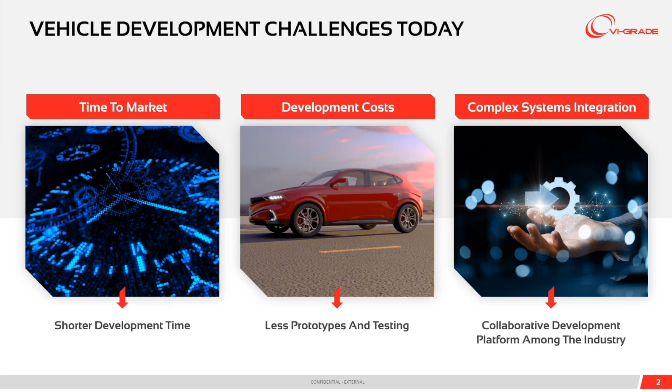Third, the systems inside modern vehicles are more complex. Electrified drivetrains, ADAS, active chassis systems, and sophisticated electronic controls all need to be integrated and bound together. Finally, development is global. OEMs, suppliers, and partners are spread across multiple locations. This requires collaboration platforms that allow models and results to be shared reliably and securely. These are the realities that shape our approach to simulation.

What is VI-CarRealTime, and what do we need to do today to meet the challenges just mentioned? We need accuracy, so that engineers can trust the simulation results. We need efficiency, so that results are available quickly enough to guide decision-making. We need the ability to evaluate designs rapidly and optimize them early without waiting for prototypes.

We need seamless collaboration between global teams and suppliers. And finally, we need one consistent model that can follow the entire process, from the first design concept to the final validation. This is exactly what CarRealTime has been designed to deliver.

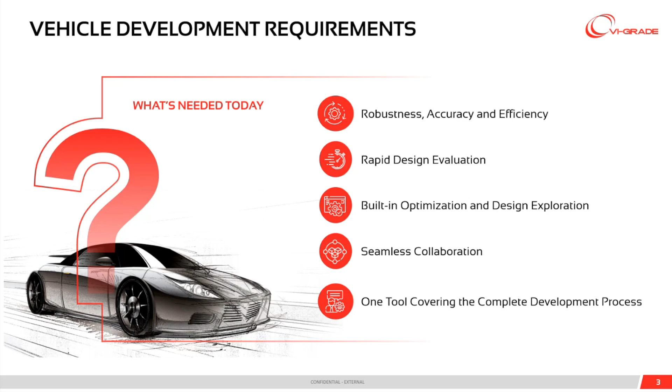Robustness, accuracy, and efficiency are not optional in simulation, they are essential. This is why they are the first unique strength of VI-CarRealTime. The tool is tested daily by OEMs and suppliers worldwide under some of the toughest development conditions. With it, engineers can evaluate tire performance virtually before a prototype exists, develop next-generation chassis control features, deploy advanced drive-by-wire systems, and even prepare a vehicle aimed at record-breaking performance.

What matters most here is that engineers do not waste time waiting for results. The solver delivers feedback instantly, so focus stays on development decisions rather than on managing the tool. That is why leading companies choose VI-CarRealTime, because it's fast, accurate, and reliable enough for their most demanding programs.

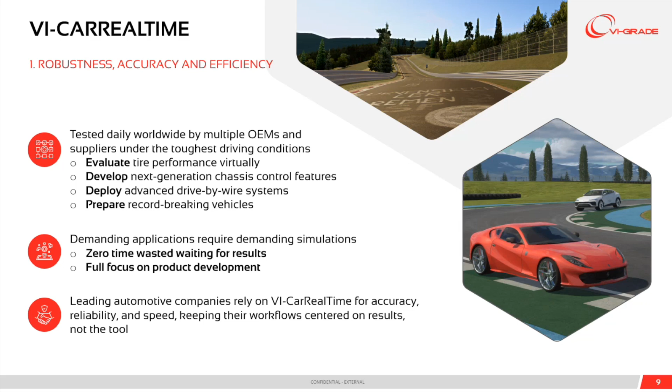Accuracy also depends on starting from validated models. Starting data are really important. With VI-CarRealTime, engineers can benchmark their design against internal and external targets with confidence. Through access to the IDIADA library of validated vehicle models, they can compare against trusted references from top brands. The K&C wizard makes it easy to build a benchmarking model quickly using real suspension data or experimental K&C maps.

On top of that, visualization tools like the Animator allow engineers to make direct visual comparisons across analyses or against CSV data. It's as well possible to transfer data to external post-processing environments. The result is a workflow where benchmarking is fast, intuitive, and directly tied to real-world vehicles, ensuring the model delivers robust and accurate insight.

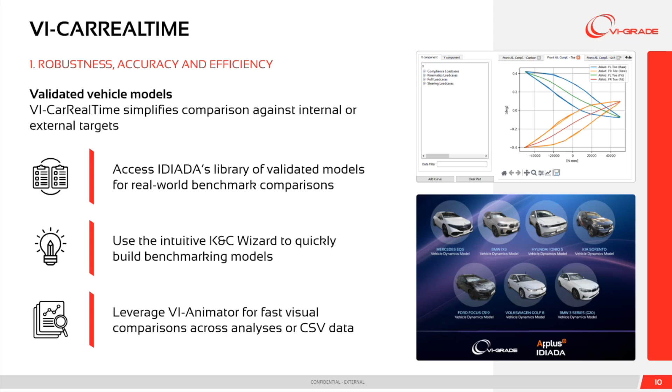Robustness also means being flexible enough to integrate complex mechatronic systems. VI-CarRealTime supports this through customizable connections for control logic. Engineers can deactivate subsystems to create custom setups or insert their own user-defined logic at different points in the model to control specific vehicle functions.

Equally important is seamless integration of external models. Subsystems developed elsewhere can be connected from MATLAB Simulink, FMI-compatible tools, or directly through C and C++ code with an extensive solver API set. This capability ensures that no matter where a subsystem is developed, it can be brought into one consistent environment, preserving both accuracy and efficiency across the full vehicle model.

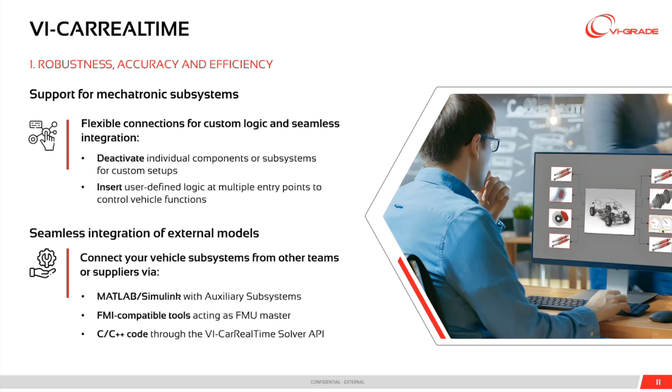Efficiency is not just about how fast the solver runs. It's also about how engineers interact with the model. Complex models with thousands of parameters can be difficult to manage if not organized correctly. With VI-CarRealTime, this is simplified through the override file system. Engineers can manage different model variations without duplicating data.

They can focus only on tunable parameters relevant to the task at hand, while the rest of the model remains protected and unchanged. This system also makes it possible to limit edits when models are shared with suppliers, safeguarding intellectual property, but still allowing necessary adjustments. The result is that engineers can run analyses more efficiently, spend less time on model housekeeping, and more time interpreting results. That is what keeps a simulation scalable and usable even in the most demanding projects.

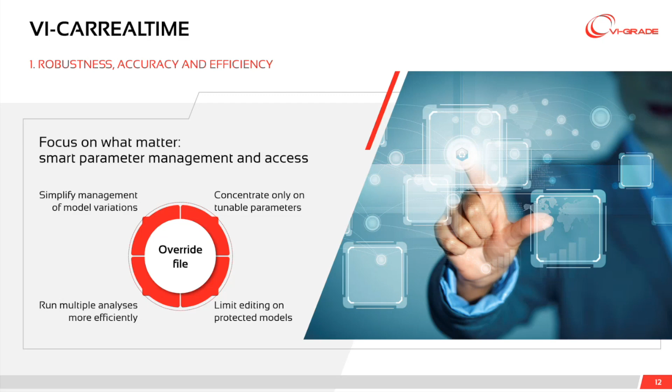Let me illustrate robustness, accuracy, and efficiency with a concrete customer case, Goodyear, to start. Goodyear needed to improve the way they developed and validated tires. The biggest challenge was correlation. Simulator results had to match road tests with high precision. Without this, simulation could not replace expensive prototypes.

The process itself was costly and slow because it relied heavily on physical tire builds and on road testing. Validation was complex, covering many platforms and specifications, and driver feedback could be inconsistent without a robust model. In short, the combination of high cost, long lead times, and inconsistent data was holding back tire development.

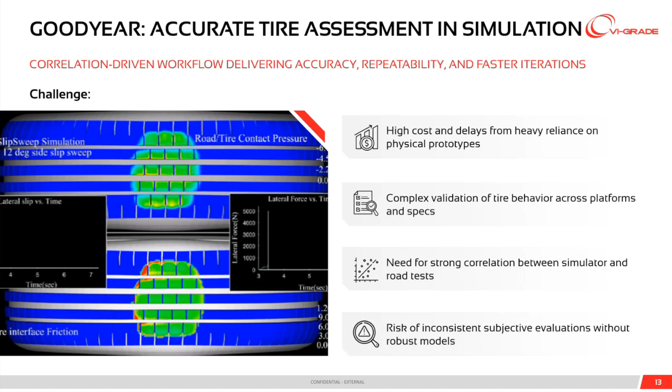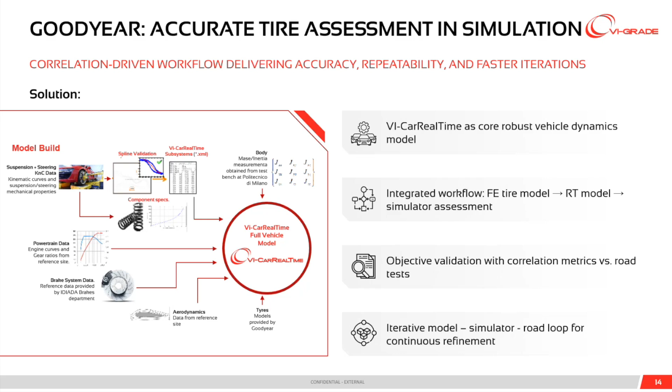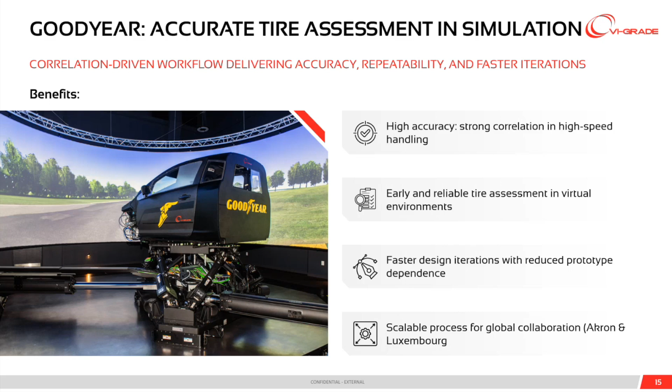This approach delivered clear benefits. Goodyear achieved strong correlation in demanding conditions like high speed handling. They were able to evaluate tire performance early in virtual environments before prototypes existed. Physical testing was reduced, which saved cost and accelerated design iteration. Finally, the process was scalable, enabling collaboration between Goodyear's global teams in Akron and Luxembourg. Together, these results showed that VI-CarRealTime could provide the robustness, accuracy, and efficiency needed to transform tire development. Virtual tire development is nowadays an established methodology implemented by many tire makers and OEMs.

Let's now have a look at the rapid design evaluation, the second key topic we started from. Rapid design evaluation begins with flexibility. In VI-CarRealTime, engineers can reuse subsystems from past projects by accessing them through database-driven storage, saving time when starting a new program. They can also disable non-critical details to focus only on what really matters for a particular study. Baseline setups can be adjusted with simple K&C scaling factors, providing a fast way to adapt an existing model.

On top of these, ready-to-run models come with built-in control and lookup components, so teams can quickly move from setup to testing, and when entirely new designs are needed, engineers can create suspension concepts directly via VI-CarRealTime, using the template-based suspension module without needing a separate design tool. With this combination of reuse, adjustment, and creation it is possible to go from an idea to a testable suspension in a very, very short time.

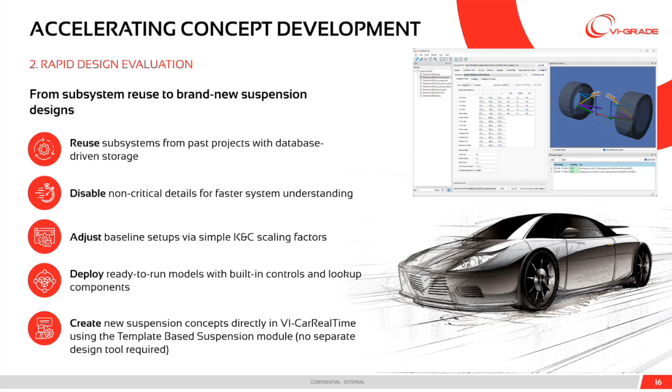Once a model is ready, the next step is testing it. VI-CarRealTime includes a rich test mode library that allows engineers to run standard evaluations instantly. They can conduct both open loop and closed loop tests, using VI-Driver, execute complex maneuvers like the ISO double lane change, and build custom events with VI-EventBuilder to match the specific workflow. Advanced tire models such as various Magic Formula from Pacejka, FTire, CDTire, Swift, and many others can be used to increase fidelity.

And with the help of VI-GridMesh, engineers can access an extensive proving ground roads library and create high-fidelity road surfaces. This ensures that rapid design evaluation is not just fast, but also realistic, covering the same conditions vehicles will face in the real world.

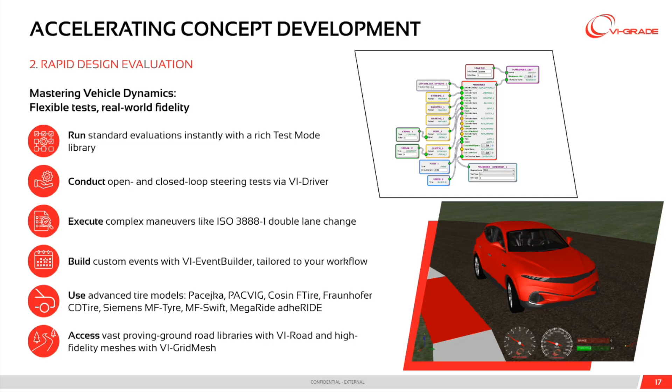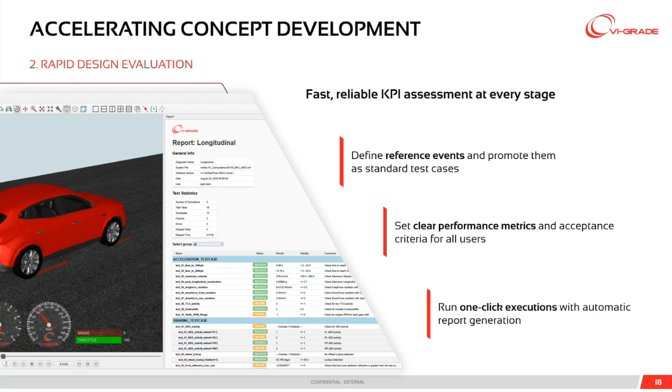Rapid design evaluation is only useful if performance can be measured consistently. VI-CarRealTime provides exactly this with fast and reliable KPI assessment at every stage. Reference events can be defined and promoted to standard test cases so that all engineers use the same benchmarks. Performance metrics and acceptance criteria can be clearly set, ensuring the results are comparable across teams and projects. Finally, one-click execution with automatic report generation makes it easy to run an assessment and immediately share the outcome. This means KPIs are not just fast to obtain, but also standardized and transparent, which is critical for confident decision-making.

A highlight of rapid design evaluation is the max performance event. With just one click, engineers can assess vehicle performance around the track. Internally, this specialized event executes a two-stage evaluation process. The initial phase performs a rapid performance estimation using a quasi-static approximation of the vehicle model, enabling fast iteration. This is followed by a verification phase that utilizes the full dynamic simulation model, incorporating control systems and any additional model extension. Through iterative refinement, the VI-CarRealTime solver computes the maximum achievable performance along the given driver trajectory.

The framework also supports the customization of the validation criteria, allowing for tailored evaluation across diverse application scenarios. This feature provides immediate data-driven insight into how design changes affect the overall performance beyond the pure lap time. That is, of course, the starting target, but is not enough to judge when things are really set up at best.

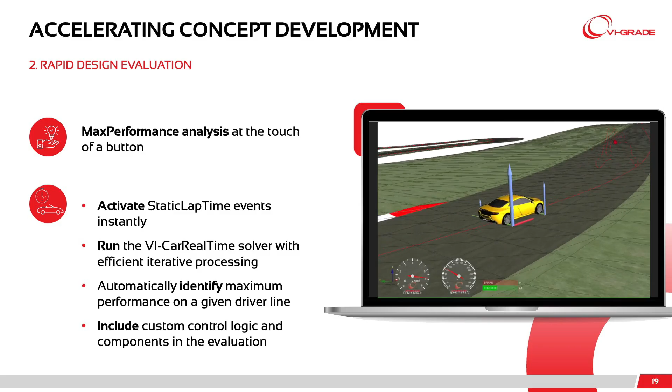Singer Vehicle, a Californian-based hypercar manufacturer, is developing some of the most advanced performance cars in the world. To meet their ambitious target, the team needs to evaluate innovative suspension and layout concepts quickly, balance extreme performance goals with limited developmental resources, and make confident data-driven decisions early without relying solely on prototypes.

To address these needs, Singer has recently adopted VI-CarRealTime. Their intention is to use the software as the backbone of a new virtual design exploration workflow, enabling them to run rapid KPI assessment, such as the lap time simulation we have just seen, or any other performance envelope simulation, integrate custom control logic into the model for realistic evaluation, explore multiple design alternatives virtually, and iterate with much greater speed.

By bridging VI-CarRealTime into their own tool, Singer aims to accelerate innovation, so shorten the time needed to develop and validate design choices, increase agility, switch between alternative concepts without the cost of building physical prototypes, and build confidence early. Use simulation data to confirm hypercar level performance targets before any prototype is produced and brought to track.

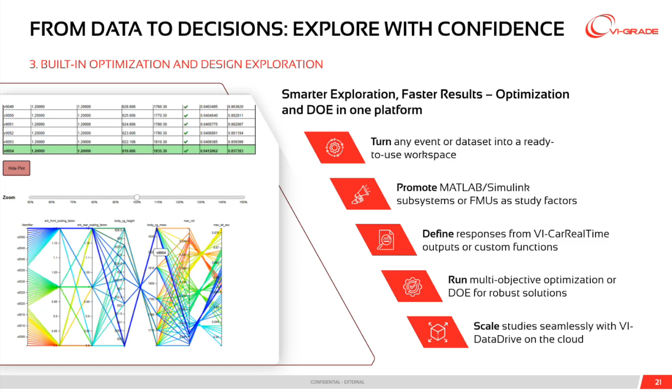So optimization includes not only the vehicle dynamics model, but also the connected control logic. Responses can be defined either from the VI-CarRealTime output or from custom functions, giving full flexibility. The platform supports multi-objective optimization and design of experiment, so engineers can explore trade-offs and find a robust solution instead of relying on trial and error.

Let us look at how this concept is applied in practice with the case of Astemo. Astemo, a global Tier 1 supplier, was working on damper development for battery electric vehicles. This task is especially demanding because battery electric vehicles have unique constraints. Heavy battery packs affect weight distribution, comfort expectations are high, and efficiency targets are critical.

The challenge was to design and tune dampers quickly while balancing all these competing requirements. Traditional approaches based on multiple prototypes and extensive test campaigns were simply too slow and too costly to keep pace with the needs of the BEV market.

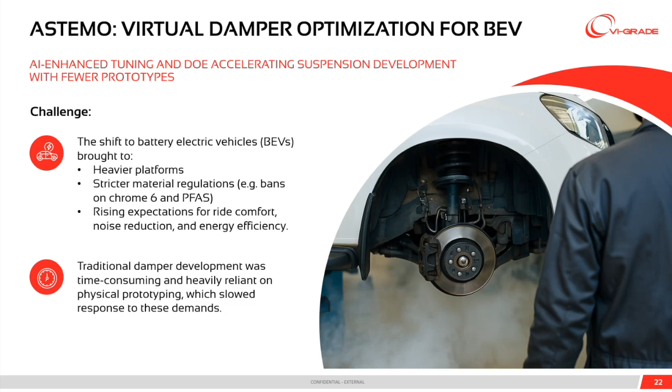Astemo addressed this by adopting VI-CarRealTime for virtual damper evaluation. The first step has been to hook into VI-CarRealTime their own specific damper model and controllers. Then, leveraging the optimization and design exploration tool, they were able to create a structured workflow that used design of experiment and AI-enhanced tuning methods.

Instead of relying only on physical iteration, engineers could vary parameters virtually and see the impact on comfort, handling, and efficiency. The integration of optimization allowed them to move beyond validating one design at a time and instead explore the entire design space systematically to identify the most promising solutions.

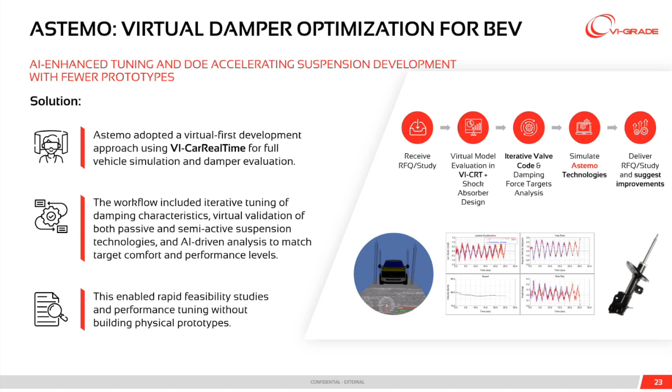This new process delivered measurable benefits. Astemo was able to accelerate the suspension design cycle, responding to RFQs faster and with greater confidence. They reduced reliance on physical prototypes during the early development phase, which saved both cost and time. They also improved the alignment between virtual prediction and real-world performance, thanks to AI-enhanced tuning.

Most importantly, they could deliver optimized solutions that met BEV-specific requirements for comfort and efficiency. This case shows how optimization of complex systems built around VI-CarRealTime really helped suppliers stay competitive in a fast-changing industry. And on top of this, the confidence generated by this initial step convinced Astemo to further expand their methodology into driver-in-the-loop and hardware-in-the-loop.

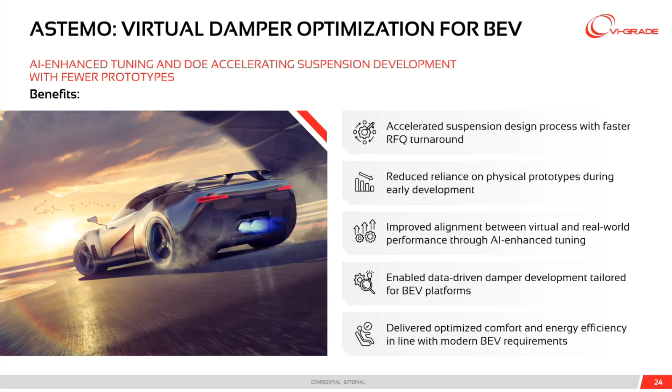This feature is all about seamless collaboration. Modern vehicle development is never done in isolation. It involves OEMs, suppliers, and global teams. For collaboration to work, all parties need a way to exchange data reliably without wasting time on reformatting or building models. With VI-CarRealTime, vehicle data can be integrated from many different sources.

Suspension K&C maps can be imported directly from Adams Car or other simulation tools. Experimental K&C data can be loaded through the K&C wizard. Generic vehicle data can be added with build mode or the MATLAB model API. On top of this, the model definition is almost entirely based on standardized text files like XML, JSON, and so on. This makes data bridging extremely easy.

The result is a workflow where everyone contributes their data into a single consistent vehicle model. That makes collaboration much smoother because engineers can focus on solving problems together rather than fighting with incompatible tools.

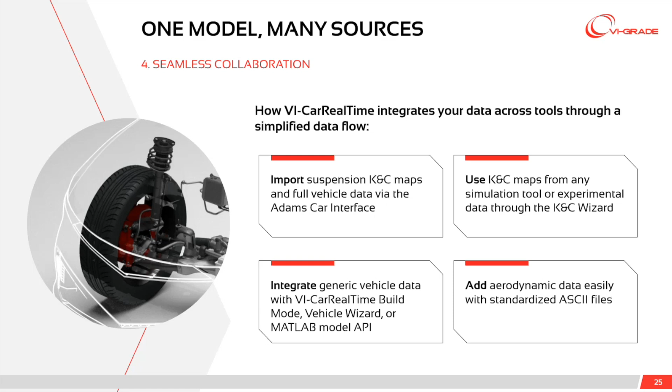Collaboration also means that the vehicle model must be usable in many different environments. With VI-CarRealTime, models can be exported as FMU packages for offline simulation in any FMI-compatible tool, or deployed on HIL platforms such as dSPACE, National Instruments, Speedgoat. They can be run as self-contained FMUs without needing extra software installation. Data can also be exported in encrypted form to protect intellectual property when sharing with suppliers.

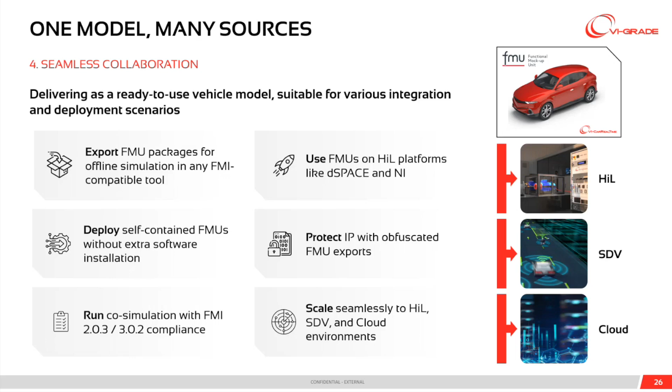The model is fully compliant with the FMI standard for co-simulation and is scaled seamlessly to HIL, software-defined vehicle workflow, and even cloud environments. But what happens if instead you have an FMU component and you want to use it? No problem, VI-CarRealTime can act as FMU master and orchestrate multiple FMU instances on your behalf. This flexibility ensures that a single VI-CarRealTime model can travel across the toolchain, across different companies, and still deliver consistent, trusted results.

A key enabler of collaboration is direct integration with MATLAB Simulink. MATLAB Simulink is still, I would say, a big player in all vehicle development. Everywhere you have a controller, most likely you have a MATLAB Simulink environment. With VI-CarRealTime, engineers can exchange data bidirectionally with Simulink, connecting vehicle dynamics directly to control logic. This means that control engineers and vehicle dynamics engineers can work in the same loop with no translation effort or duplication.

Subsystems developed in Simulink can be added as auxiliary components in the vehicle model, while vehicle dynamics data from CarRealTime can flow back into the control environment. This kind of seamless interface reduces silos inside an organization and helps engineers work as one integrated team.

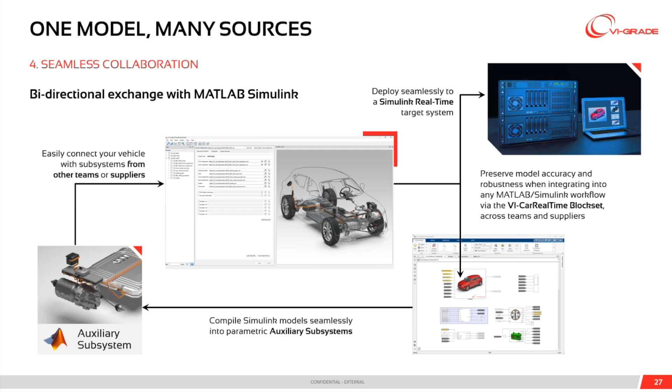Another important element of seamless collaboration is intellectual property protection. When OEMs and suppliers exchange models, it is vital that sensitive know-how is safeguarded. With VI-CarRealTime, models can be exported as obfuscated packages. This means the model can be executed by partners, but internal details remain hidden. For example, OEMs can distribute some files to run on an external driving simulator or embed supplier simulation models into the workflow without exposing sensitive data.

The same applies to deploying FMUs on both SIL and HIL platforms. The model runs securely while the intellectual property is fully protected. At the same time, editable parameters can still be maintained via an override file system. This gives partners enough flexibility to run their tests and make adjustments without even revealing the underlying confidential logic. This balance between collaboration and protection is what makes VI-CarRealTime practical for real-world industry workflow, where multiple parties need to work together without compromising IP.

Brembo, a global leader in braking systems, is an excellent example of how VI-CarRealTime enables seamless collaboration. At their coding hub in Sunnyvale, California, Brembo integrated VI-CarRealTime into their software development process. The objective was clear: to validate new braking control logics virtually before they reached the vehicle. The adoption of VI-CarRealTime, together with the MATLAB Simulink interface, laid the foundation for workflows that are more efficient, agile, and collaborative. Instead of waiting for physical tests, teams can share results earlier, test more scenarios, and refine their software faster.

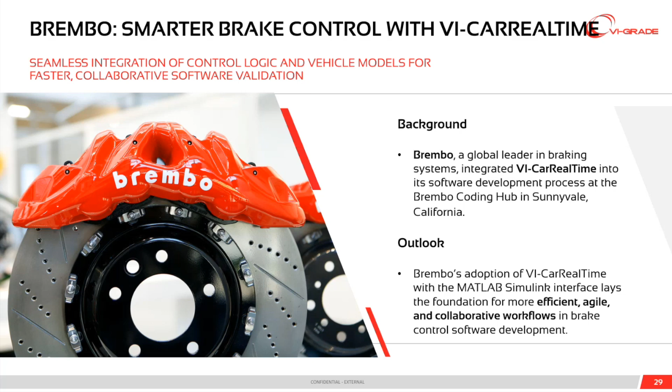Specifically, Brembo used VI-CarRealTime to support the virtual development and testing of braking control software functions. This means engineers could validate control logic before ever putting it in a real vehicle. The integration with MATLAB Simulink was key. Brembo's control algorithms were seamlessly connected with the VI-CarRealTime vehicle model, making the workflow smooth and consistent. They also made use of a unified, high-fidelity real-time simulation environment. This minimized configuration time, so new vehicle dynamics simulations could be set up quickly and reused across different projects.

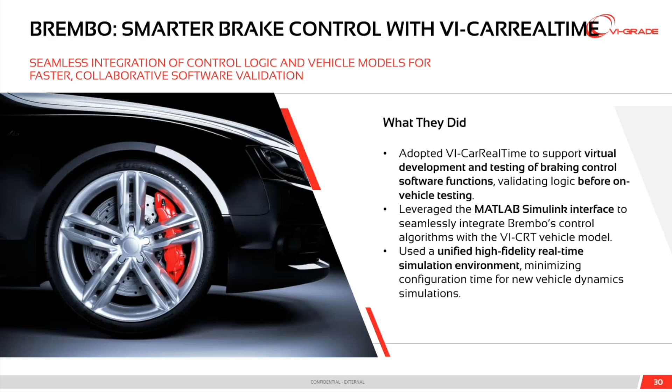The benefits of this approach were tangible. First, development loops were shortened. Virtual validation reduced dependency on physical testing, speeding up software development cycles significantly. Second, seamless integration between the Simulink interface and the VI-CarRealTime model ensured an efficient collaboration between Brembo's controls engineers and vehicle dynamics specialists. And third, faster time to test was achieved. Engineers could evaluate new braking logic more quickly in both hardware-in-the-loop and driver-in-the-loop environments. Together, these results demonstrate how VI-CarRealTime enabled faster, smarter, and more collaborative control software development at Brembo.

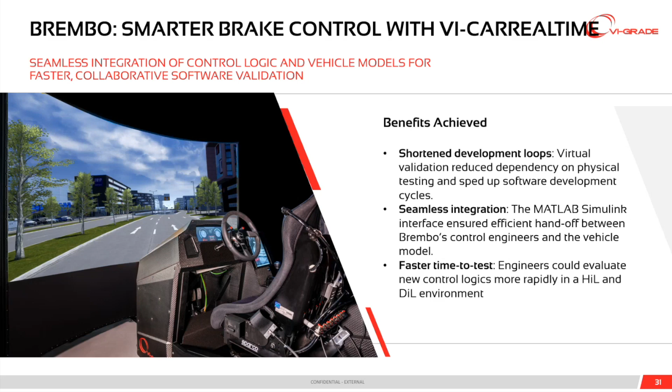Let's now explore the importance of having one consistent tool for the entire development process. With VI-CarRealTime, you do not need a separate model for each stage of the workflow. The same universal vehicle dynamics model can be used across desk simulation, high-performance computing campaigns, software-in-the-loop setups, hardware-in-the-loop rigs, driving simulators, and even vehicle-in-the-loop testing. Think about how much time can be saved just by this. One model that can go across the entire spectrum of development needs.

This consistency is critical. It means that the results from one stage can flow directly into the next without translation error or rework. Engineers across different disciplines and locations all use the same backbone model, ensuring that validation is both efficient and trustworthy from the first concept to the final sign-off. This is a super powerful capability.

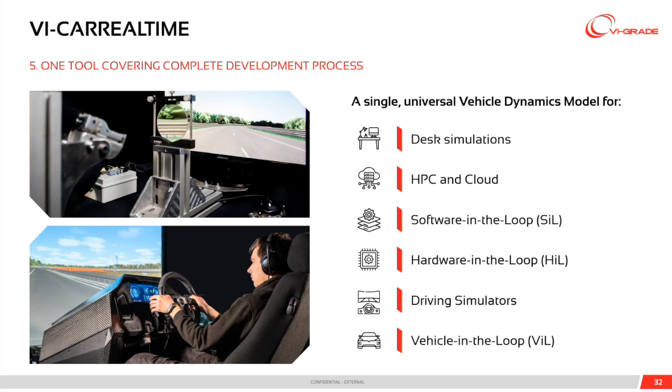VI-CarRealTime also serves as a unified tool for performance development, supporting both objective and subjective evaluation. On the offline side, engineers can group multiple analyses with test mode fingerprints, apply design of experiment and multi-objective optimization, and visualize results with customizable plots, as we said with the animator, for example. Reporting can be automated with Python scripting, and results can be imported directly into MATLAB or other ASAM MDF compatible tools.

On the online side, the model can be deployed on any VI-grade driving simulator from compact rigs to full motion systems. Setup management is simplified with the override file, making it easy to test multiple configurations quickly. The model's scalability means engineers can start with simple configurations for early concept and then increase the complexity for final validation. This gives both objective numbers and subjective driver impressions, all from the same trusted vehicle model.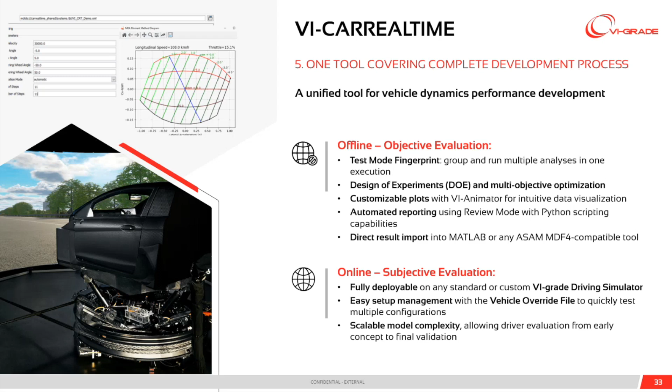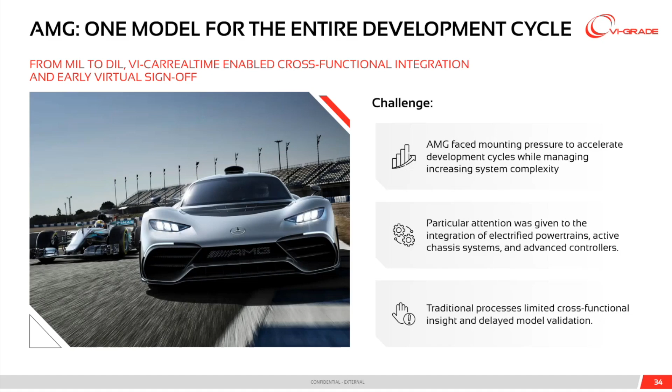To address this, AMG implemented a multi-layered simulation toolchain with VI-CarRealTime at the core. The model became the common language between tools such as AdvanceCar, Simulink, TargetLink, CAMSIM, and a bunch of FMUs coming from everywhere. By anchoring everything around the VI-CarRealTime model, AMG could connect vehicle dynamics, control, and hardware representation into one consistent loop. This meant they were able to use the same validated model across software-in-the-loop, hardware-in-the-loop, and driver-in-the-loop stages. The toolchain became multi-layered, but also unified, with VI-CarRealTime acting as the backbone.

Here we see how Mercedes-AMG structured their solution. They built a multi-layered simulation toolchain with VI-CarRealTime at its core. This toolchain supported the rapid development and integration of both hardware and software systems. What made this approach effective was cross-functional collaboration. By using VI-CarRealTime as the dynamic simulation environment, AMG enabled seamless communication between teams working on vehicle dynamics, powertrain, and control software. Everyone was connected to a unified digital backbone.

This setup provided a platform that was both stable and agile, allowing system fusion and joint model validation across different disciplines. It meant that engineers in separate departments could work on the same model, validate their subsystems together, and move forward without the delays that come from isolated workflows. The toolchain spanned from SIL, so software in the loop, to driving simulators, to drivetrain test benches, all tied together by one consistent vehicle model. This ensured that validation could take place early, often in realistic conditions, supporting AMG's goal of achieving early virtual sign-off.

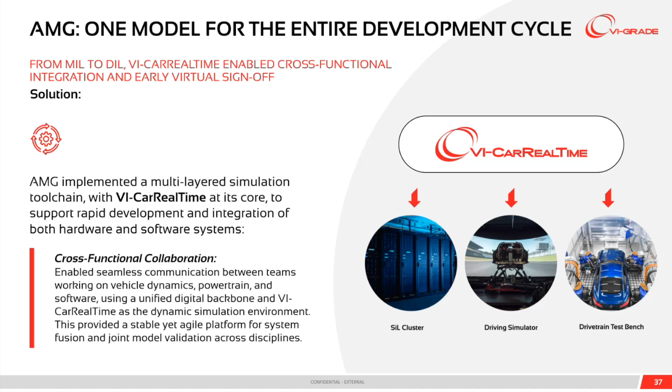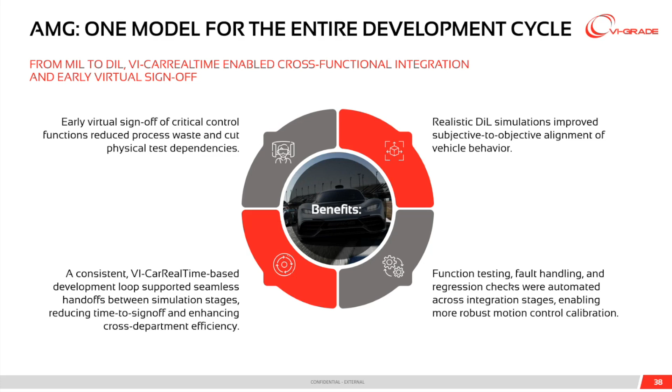The results were significant for AMG. They achieved early virtual sign-off of critical control functions with reduced process waste and cut physical test dependencies. Driver-in-the-loop simulation provided more realistic evaluation, improving the alignment between subjective driver feel and the objective data. Function testing, fault handling, and regression checks could now be automated across integration stages, which made motion control calibration more robust. And the consistent VI-CarRealTime based development loop ensured smoother handoffs between simulation stages, reducing time to sign-off and boosting cross-department efficiency. In short, AMG proved that one consistent model can cover the complete development cycle, from concept to the final sign-off.

So, as we close, let us recap the five key strengths of VI-CarRealTime that we have seen proven in customer applications. First, robustness, accuracy, and efficiency. VI-CarRealTime has been validated in daily use under extreme driving conditions, delivering results engineers can trust. Second, rapid design evaluation. The tool enables fast iteration cycles, giving instant insight and reducing dependence on costly prototypes. Third, built-in optimization and design exploration. With integrated DOE and optimization, engineers can find the best solution and explore alternatives systematically.

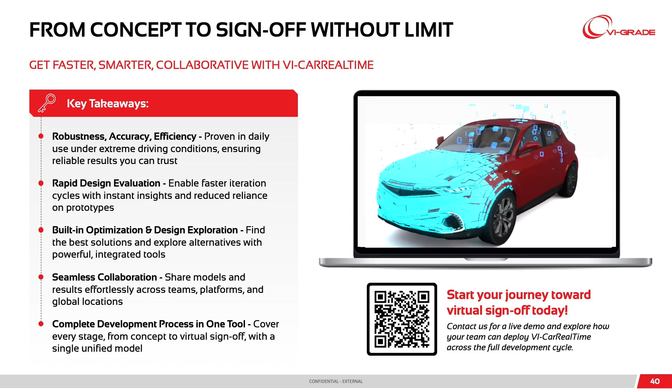Fourth, seamless collaboration. Models and results can be shared effortlessly across teams, platforms, and global sites, with full IP protection where needed. And finally, one tool covering the complete development process. From concept to virtual sign-off, the same unified model supports every stage of development. This is why leading companies rely on VI-CarRealTime. It allows them to move faster, make smarter decisions, and collaborate more effectively.